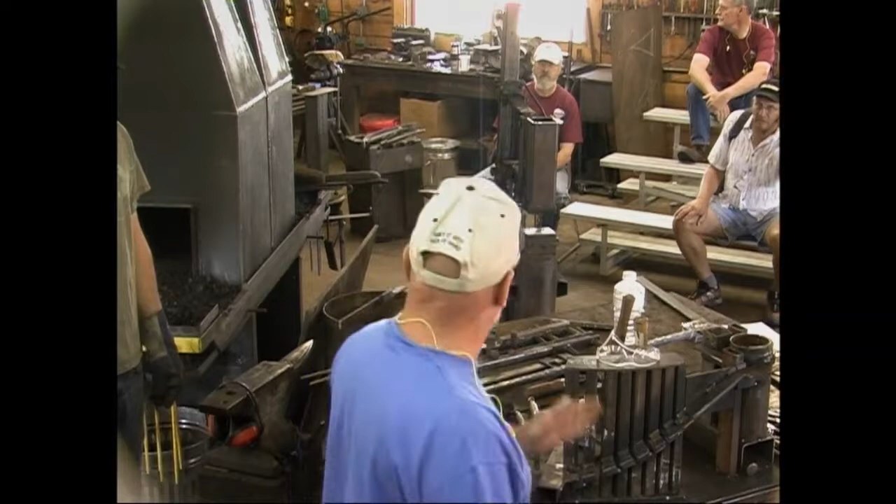Thank you. This is pretty awesome being here with you guys and in this place.

When I first started blacksmithing, I didn't know about Rocky Mountain Smiths, and I kind of just clunked along trying to teach myself. My great-grandfather, when I was a little boy, inspired me, and I said, this is what I want to do. Honestly, since I was 4 or 5 years old, I wanted to do blacksmithing, but I used to say, but I want to be an artist too. At that time, in my vision, the two didn't work together, but here we are.

When I heard about Rocky Mountain Smiths, there was another blacksmith I competed against on a job in Telluride. I won the contract, did the job. He came kind of grouching to meet me and asked me where I learned, and I said, right here. I don't know anything, I'm just teaching myself as I go. I had Jack Andrews, The Edge of the Anvil. It's an excellent book, and there's a new version now. You should have it. Just do the steps in there, and it'll take you far.

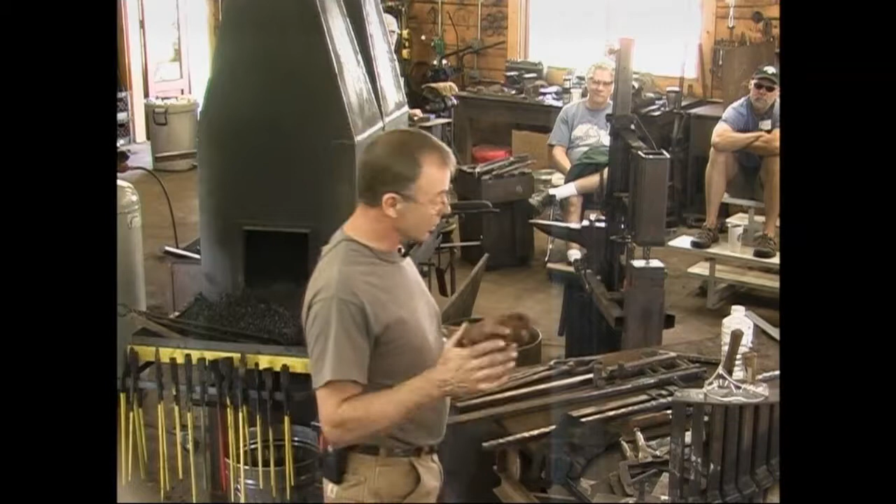When I was young, I worked in a fabrication shop where we built railing, lots of railing. It was aluminum, we had many products, but that was our primary line. The engineers weren't careful, they kept putting plus or minus everywhere. I learned a big lesson from them because I was production manager. Everybody that worked in that shop producing worked for me, and so every mistake was mine.

Plus or minuses, those guys didn't work for me, I could not tell them what to do. And I learned how to measure and lay out because they didn't. They knew, they were highly educated and intelligent, but they didn't care. So all of us worker bees had to constantly rework and rework. So this fixture might look like a lot for a scrawny little piece of handrail, but if you make it right the first time, there you are, you make money.

And the other thing about making it right, finding a way that works and doing it that way every time, is you'll be faster. I find if I haven't drawn something fully, even if it's an artistic piece, I want to know where I'm headed. If I haven't really got a full plan in my mind, when I come to the fire, I'm wasting heats, I'm making scale. So know where you're headed, make a plan, and then go for it. You can work fast, you can be productive, and you can make money blacksmithing.

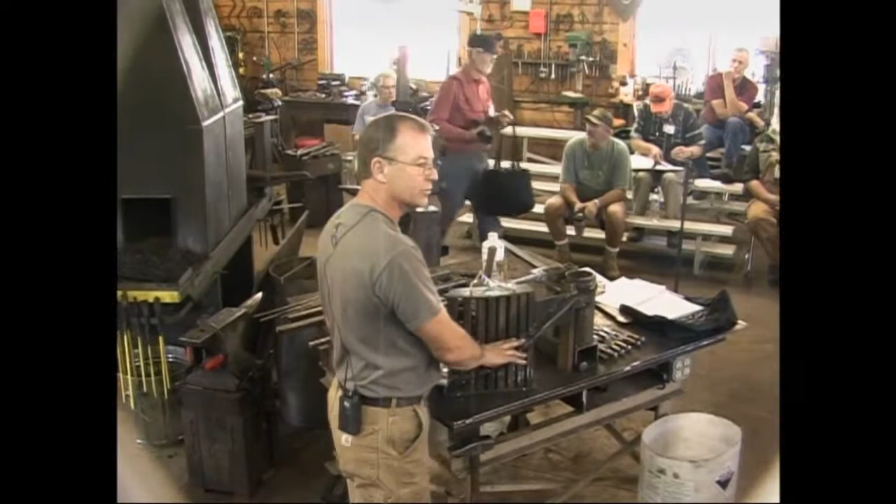We came to the exterior and there were 4 sets of stairs coming into the home. They all had similar handrails to this. This is actually the form built for half of one stairway, so there's a left and a right.

I always, when I'm on the outside, I look at the house and view it from the outside looking in. Every drawing I do, I've been doing that for 30 years, so I don't confuse myself. This is the left side, the right side's over here, matching. When you walk up to these, I don't care where you look at them from, these handrails and the other 3 sets all match.

They're exact, or as near as you can do. We work to plus or minus a 16th. We work in 32nds doing hot work, and you can do it. You can definitely, yes, and very, very doable. So the form is worth the time.

First thing I do, I start drawing it, and I've got some handouts that we can give you guys. That show there's 3 pages for... I should have split them and started. I didn't number them. They show the field measurements, so a pencil sketch done on site.

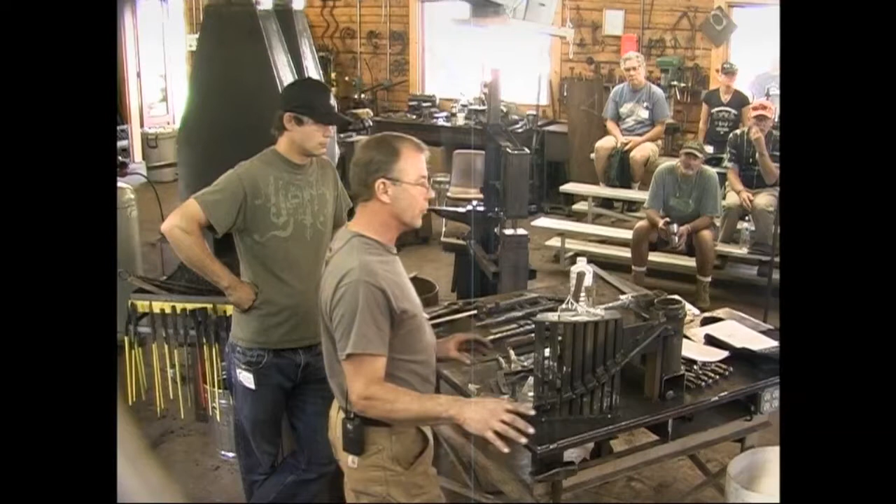Lee just reminded me, date your work. When you go back to a file, sometimes the job will stop for some reason, and it's really important to know when you did that work in the job because changes have been made, and you can place that drawing in the schedule. When I don't do it, I regret it. So date your drawings. Probably those don't have them.

Whether you're measuring for something with a helix or just a straight stair rail, there's a few things that you have to know. You want to know where you're attaching the railing. Does it attach to a wall or a column? Is it attaching to posts? Is there going to be brackets mounted on the wall? You have to find those.

You have to find out what are you going to secure to. Find out what's in that wall. If you show up with a finished piece and you can't place it there, now what? You're spending money reworking your piece. So up front, find out what's in the wall or whatever you're attaching to.

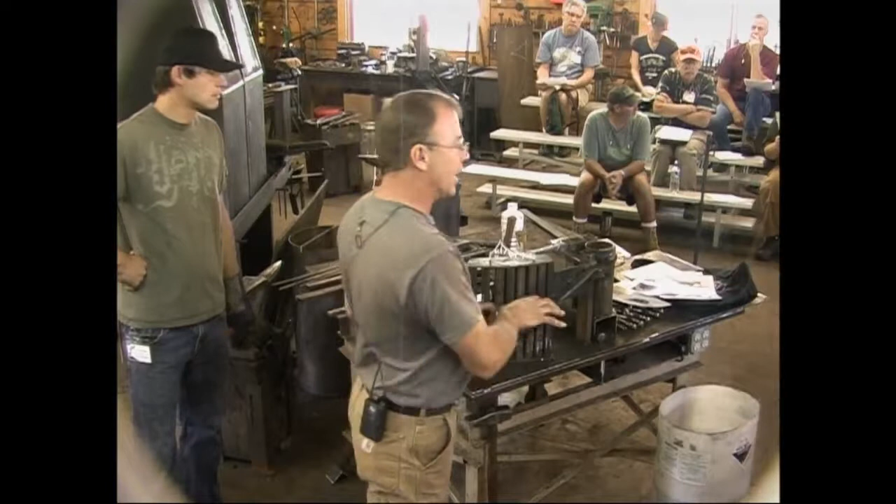So I know where I'm going. I go out to the site, take my field measurements. I need one of these. I take my field measurements and I make sure that I get all of the dimensions of the stair. Each tread, its run, its rise, the overall. This one's small, but if you have 6 treads or 8 treads, get the full length.

You want to know, go ahead, in this particular home, it's all limestone block. And so I needed to check the right height and location, make sure I wasn't too close to an edge of the piece of limestone. I would have to adjust where I'm going. So get all of those, your foundation first. Know where you're going, get that.

Mark it on your drawing. Draw it, take pictures of it if you want that. And then I do a plan view and an elevation. And when I get back to the shop, I know what I have. So you'll need the relationship from the first nose, the top nose of the stair, and the bottom nose to the building, wherever you're attaching.

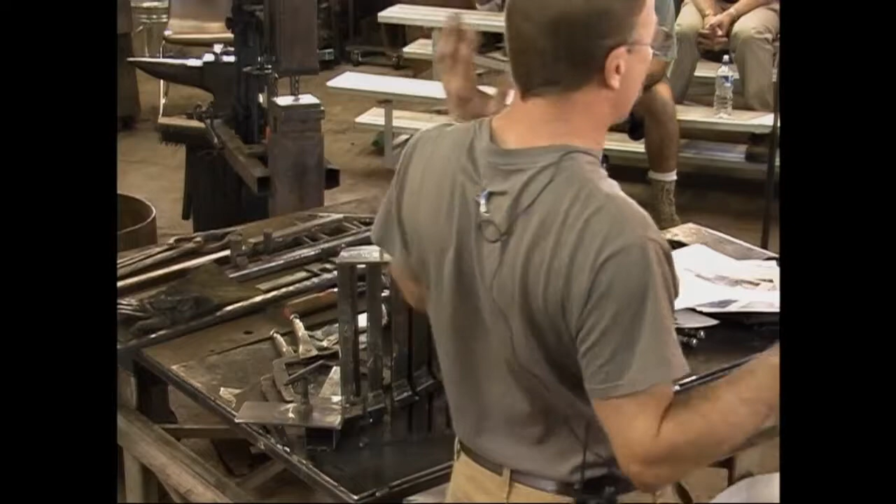You can see it there. That's my riser height, that's all I needed for this particular one. It's pretty easy, and then everything else is looking straight down. It was the measurements I took on site. I didn't have to do any real calculations other than - then I needed to know for a bending form, you're always bending against the inside edge.

You can bend the other way. You can hammer into a swedge. But when you're doing big architectural bars, it's really difficult - you get a lot more drag. The force is easier to apply bending around. So you want to work to the inside of your curves.

If you're doing a big curving stair, James has pictures in his portfolio of gorgeous forms, and they built 3 stories of railing. They built around a form, on the inside of the curve. That's the easy way. Avoid doing the other side if at all possible, but you can do it.

So we start up here. Actually, we're going to start here because it's easier for us to bend this one. We have an indexing point on this rail. It's slit and drift, and then we plug weld it in around. The architect drew this, and our cap has a 2-inch swell on the end, and we have a 2-inch ball. He wanted those two to match.

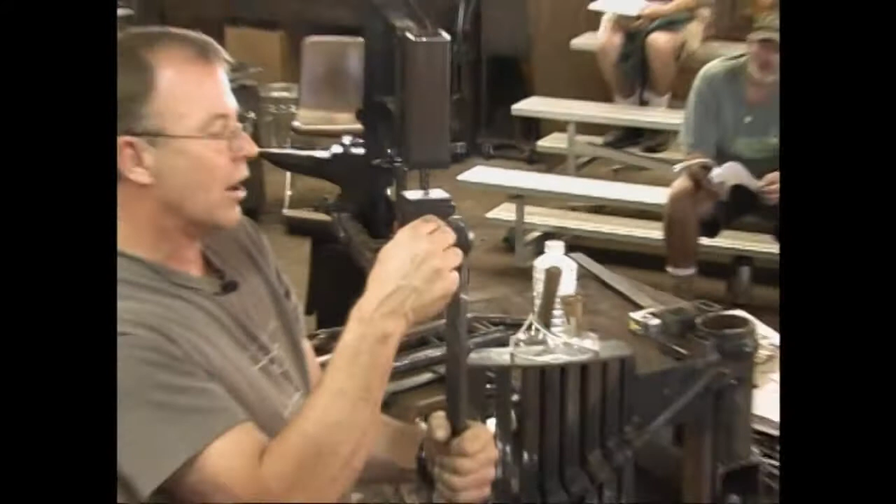And I only come through with a 3/8 stud to join everything. We slit a hole for a 1-inch drift, drifted this out and welded that in. You could upset it and just put a small hole in also, if you want to do it that way.

I have a bunch of them to do, and this is how I feed my family. So I plug welded that in. That's probably cheating, but it gave me a nice big swell, and it's hot slit, traditionally done. It's just got extra metal added in. You could cut that piece long and forge weld it if you want.

But that index is on our form, and we want this to be exactly over a spot on the site. So I need to hold this perfectly in relationship to everything else.

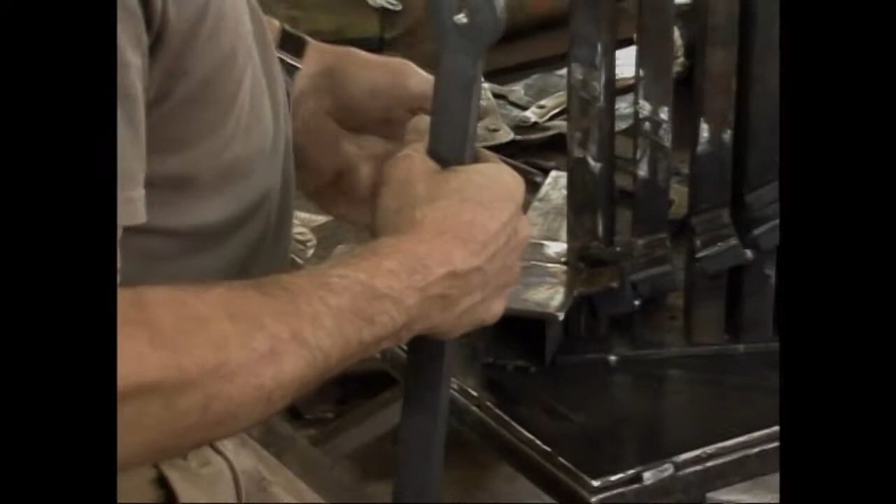There's a stud that we weld into the form. Often we'll just weld a nut underneath and run bolts through with a cordless. But that drops down there.

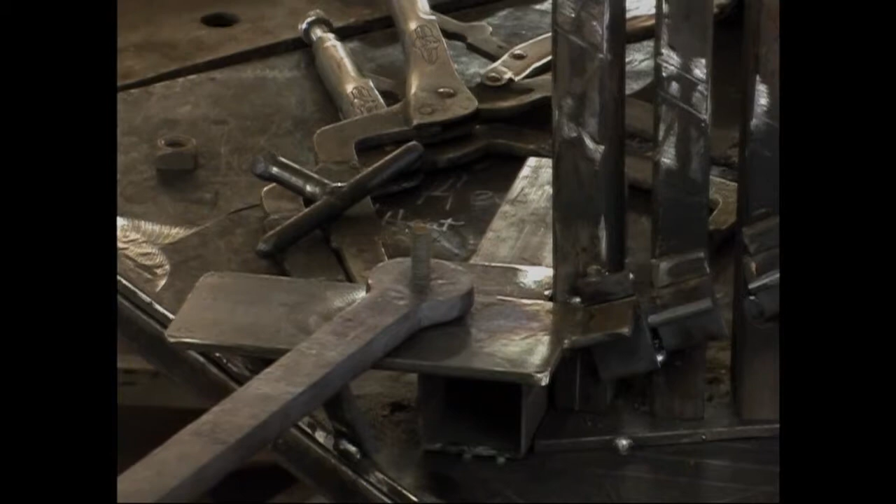And every time, this piece is going to come back to this form and fit in the same place. Whether you're doing whatever you're bending, you want to come back to the same exact spot on your form if you're taking multiple heats and multiple bends. So you need some way to index it. It could just be a silver pencil mark and lining up, and often we do. But for this, we really have to hold it.

We're twisting, we're bending, and then we're going to put a lot of force with the 90. The other reason the 90 is done last is all of this bar is going to stick to this form, and it's easier to clamp it and make that bend. Making a tight bend around a form, it's going to want to pull and slide on you. This way, we're stronger than the resistance in the metal.

So I want to heat that. Talk about that too. So when you bend, if you have too much heat, you'll get kinks, you'll get bends you don't want. If there's a hot spot, it's going to bend there first.

We know it's 2 13/16 to the bottom of the bar where the bend starts, to the center of our bolt. We've got that marked. We're taking like a 3-inch heat, 4-inch heat. We'll line up our marks on... can you see this, James?

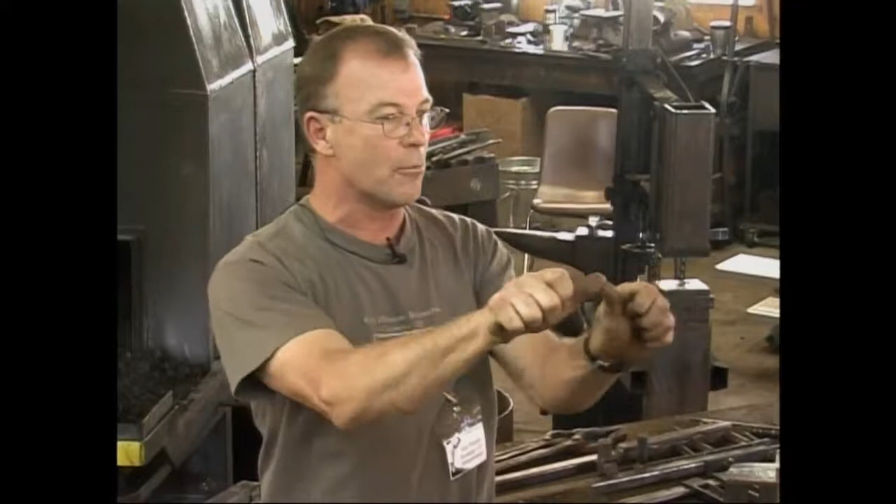Whenever you bend, there's 3 points of force involved. If you grab a piece of wire and bend it, you're holding it in two and you're pushing. Whatever you bend, you have to have 3 points of force. When you hammer on the anvil, you're hitting across the anvil and you have this. So, I don't know, maybe I guess that's 2.

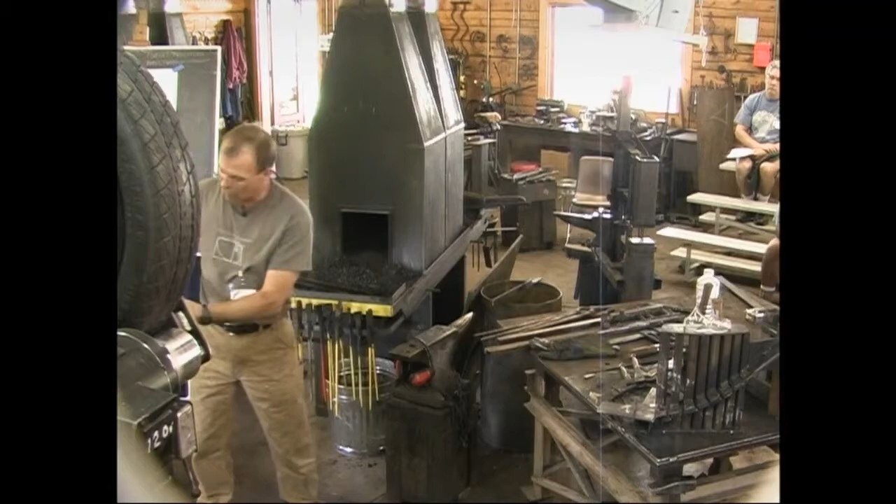But to get a bend where you want it, we use 3 points. And the bending forks, we line them up so that the center of this bending fork is grabbing just at that bend, and we pull it around so that becomes this point. We know where we're making our bend.

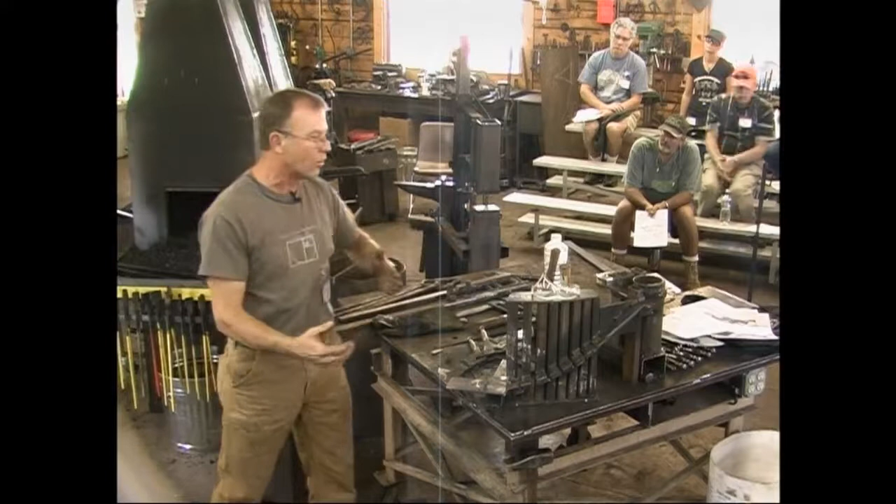You don't want to have to adjust that very much. You can with a set tool, but make that heat right where you're making the bend, and try to keep your heat behind your bend rather than in front of it. If your heat is in front of a bend, you'll find you lose your force and it bends in front of where you're working, and you can't get there. You've got to hold that, take that heat out, pull it down and come back to the point that you're bending. And then you're going to work.

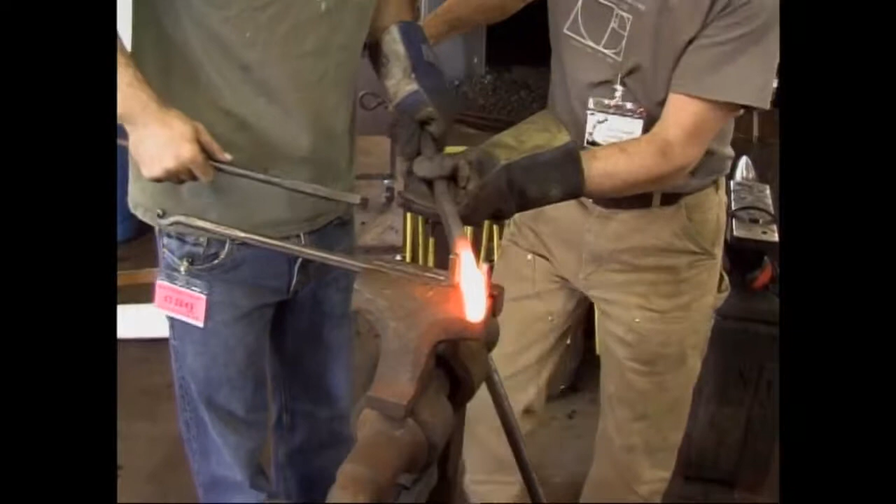And we'll move it until we're at that point, make the bend. You can do it over the anvil. About 3/4 of these pieces, I just came from the fire, popped it, and we did it. So we have our line right here, and we can see that.

So we come in, make our triangle, center our line with the center of our triangle. That's real important. And then we're pretty much right there. We've got the twist that's already interfering.

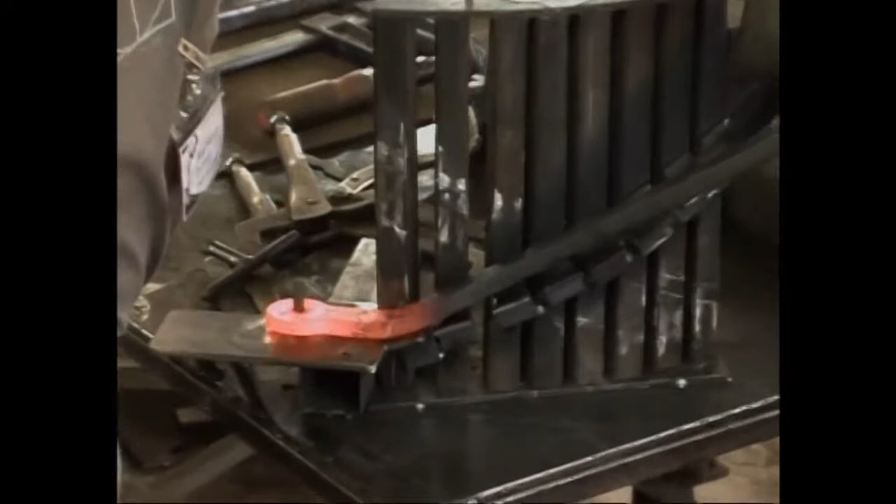Brush your work every heat. Keep it clean. If you let it cook on there, it's a lot harder, even with a power brush—you really tear up your hammer work. So brush every heat. It'll make your arms strong.

Did you make your gas forges? That one I bought. It was kind of a basket case, and it's made in Canada. It's a really nice forge. The lining was all busted out of it. Part of that is castable fire clay, and part of it is insulation board.

So we just recut it to fit the insulation board on top, put some on the sides, and then we pour the bottoms. We tear up the bottoms of the forges and have to replace them pretty frequently. So I use castable—it's cheap and really easy to work with. It needs to dry for really 48 hours, so that's the only drawback about the castable fire clay. If you're working and you break a forge, you either need another one or you've got to wait.

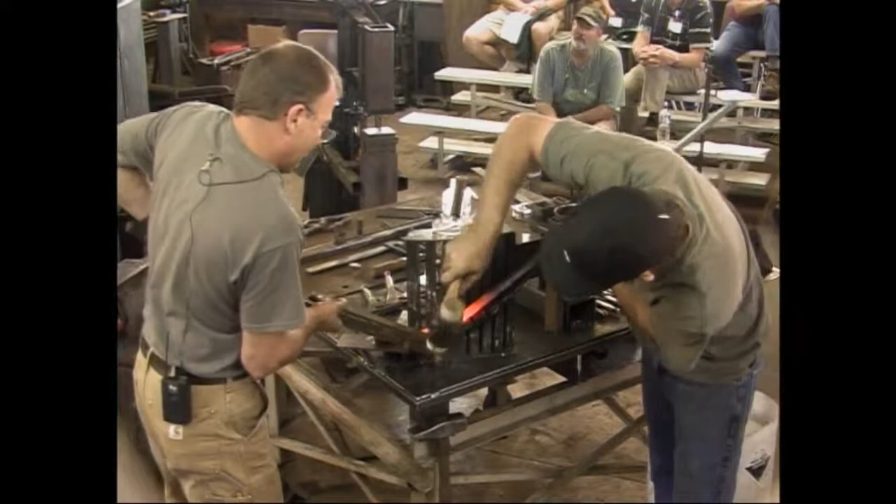I can hold down with the bending fork. I was a little high right here. Lee can just kind of pull—that's doing it. I'll pull down, he's lifting up. Now it's time for him to grab a crescent. Okay.

Whenever you're bending a helix, there's a little bit of twist as you go. The larger the diameter, the less it shows up.

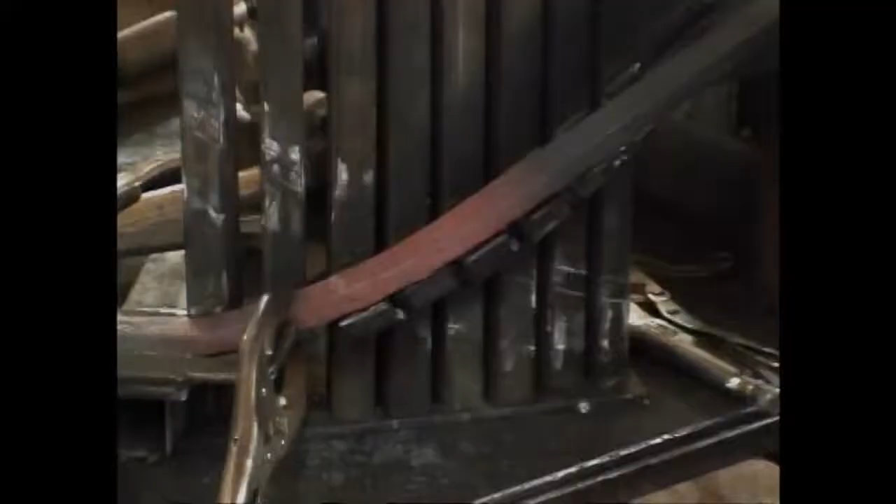Come in. Okay, that's in. So I'm not actually doing any pulling—I only work when he's actually working. A little more twist, the inside's high. Yeah.

It's really tempting for the guy with the bar to just wrap that around, but then you get ahead of the actual bend, and then you've got to get rid of that.

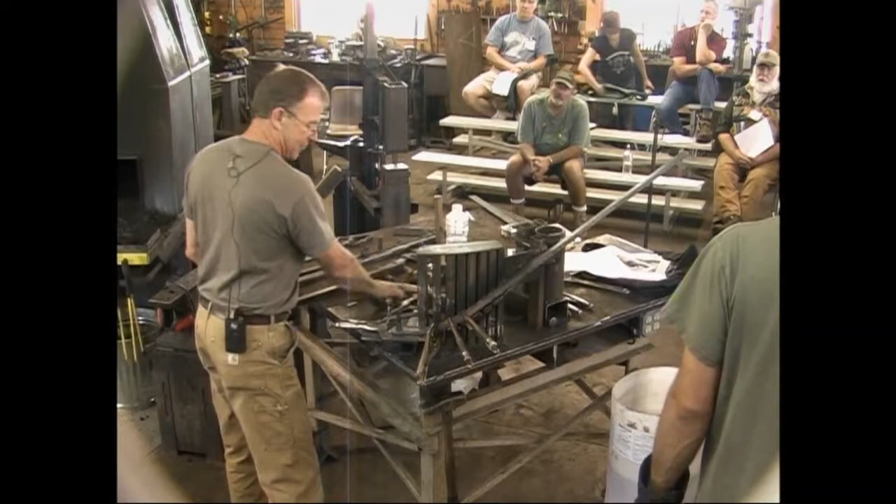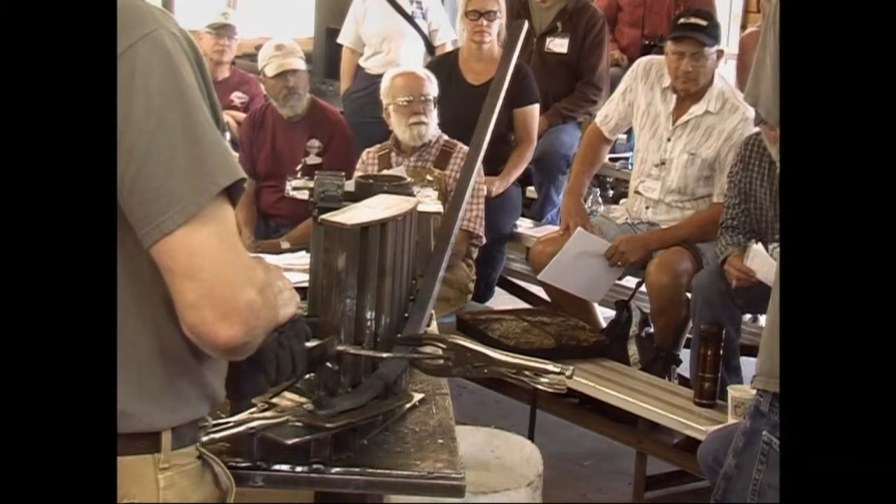Cool your clamps real often, especially this style. The C clamps, these ones, they don't get to the spring. We call these the alligator clamps because they hold everything. We took off all the teeth because they really mar your bar. So on this set, we replaced all the screws—some have holes, some don't. So all the ones without holes, you see quickly, don't have the teeth on the jaws. Just a real quick marker. And two, make sure you clench them, because those springs go and then they don't work well.

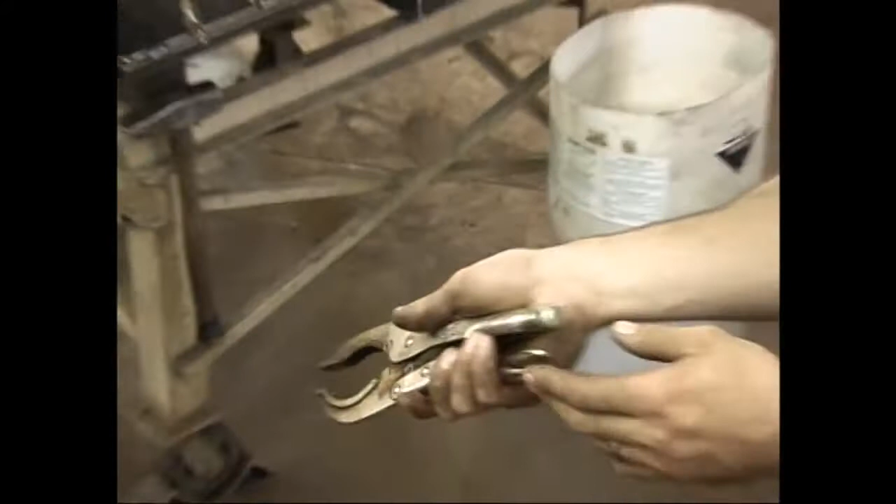Lee, can you turn those towards the camera? Can you explain it again for a second? So, for one, we've taken off all the teeth on the face here because those mar very quickly. And two, we index—let me grab—these ones have the teeth and these ones don't. So to know quickly in the shop: this one has teeth because it has a hole, this one is a smooth jaw because it's smooth. That's just a fast reference. I see it, I know—I don't waste time and I don't mar up the bar.

That's good. Under the anvil. Under the anvil. Went in that hole right there. Oh, under the anvil.

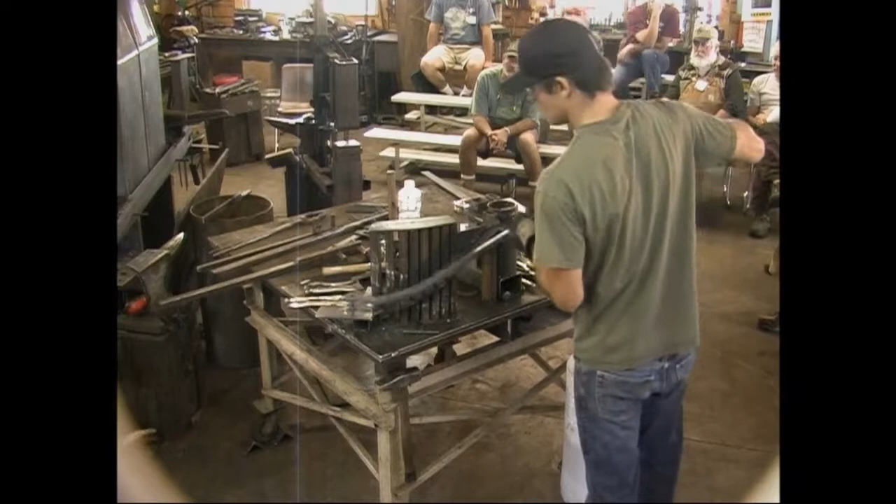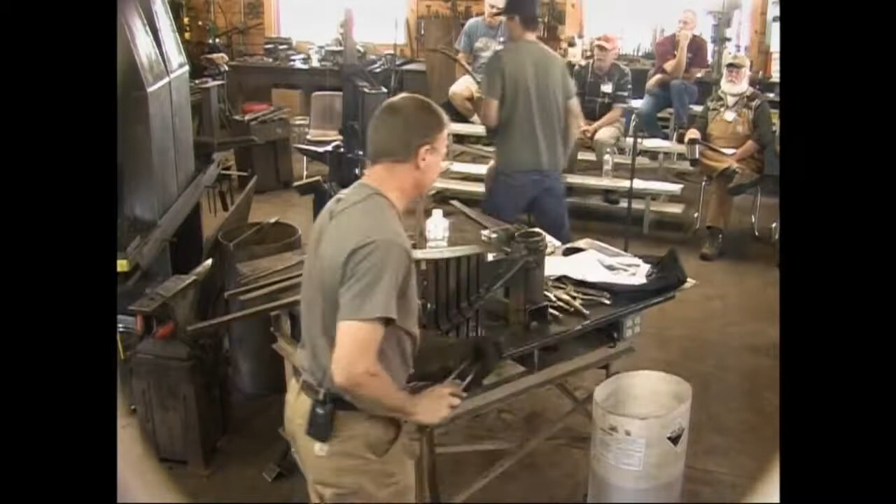Want to explain that? Look at your form, you'll be able to see where you're fit to. That's the spot where I'm just starting to break away. Lee's going to take our heat just this side of it. You don't need a lot, we're using a small forge, to show you don't need one. I have a forge at the shop that's 2 feet long that we do architectural bending in. You can bend a lot more quickly, but for this piece that's actually too big a forge.

There's only this one heat that we could use it in. So we'll take 2 heats and we can show you what we're doing. Basically, the bending is pretty easy. It's getting everything just right, keeping it just right, setting up your form.

How long did it take to make this? I don't know, I made a lot. This one, I had already done the mirror image, and I don't know if he explained how we get there. You can kind of see it cut across the other direction on the form, because it's left and right, and we can't just bend one upside down and flip it over for the other side.

You had to take, and before we even lay down our angle line for what we're bending on, we take and we draw with... just to explain. So we get our math, we know our top point and our bottom point, and we know this rake. So we can put, and we use a hydraulic hose or a heavy cord, we lay it. Whenever we have a helix, we work through it with something that'll give us a nice line to look at.

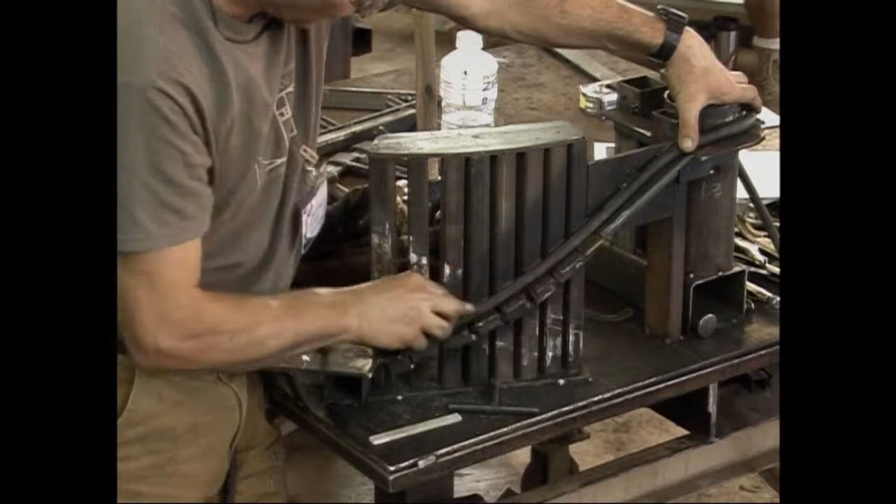And so these angles aren't here, it's just the form body. We have this one, we lay this cord on here and we know where we're coming to at the bottom. We can adjust it up and down and make it look very pleasing and get a nice line. Thank you, Lee, that's a really nice trick. If you're doing a 180 especially, a lot of them just look kinked and unpleasant, they're not very attractive.

And so for me, I build my form on either side. I've got a rail going up and one going down and my form in the middle. And I put those 2 pieces in, I know where they are, and then I bend around. I use a big hydraulic hose, just clamp it on, pull it around, and I look at it from different angles and I can see what it'll look like on site.

Then I mark that and we weld those tabs in. So that's actually made my work look a lot better since I started doing that. When I used to do it and just construct by pure math, I would get kinks because they're not always at the same angle.

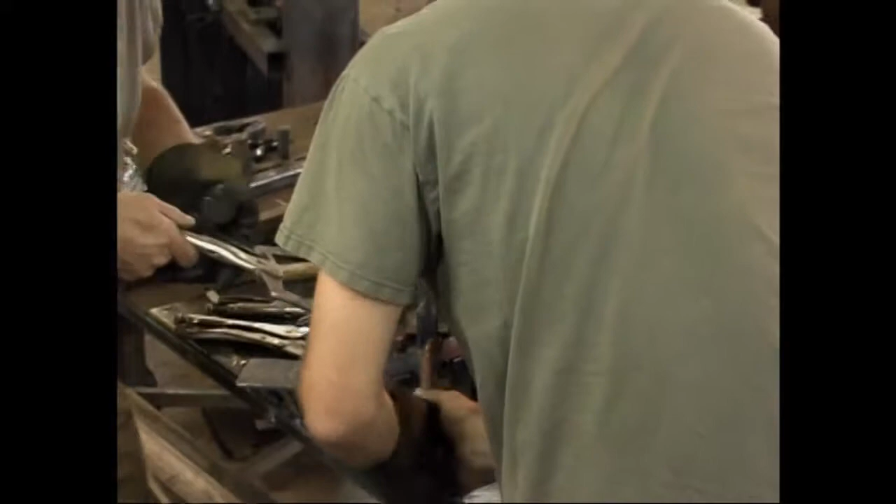Okay. Nice. And off this side.

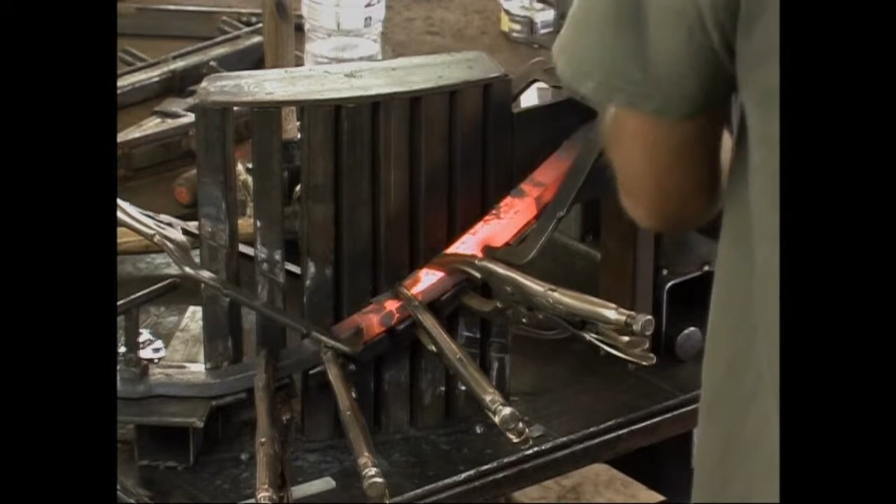So now we let the heat go out. Plan what you're going to do. Just like when you're forging, you go back to the fire, think about your next steps, plan this, know what you're doing. We've got plenty of heat here. Our next bend is right here.

In the shop, I would use the rosebud, I just heat only what I need right there. We can use the fire. So to do that, I had talked about heat behind your bend. We're not going to heat up here, we're going to heat this area and just right into there. So I've got an arrow, he can see. This stays cool, the heat's right here.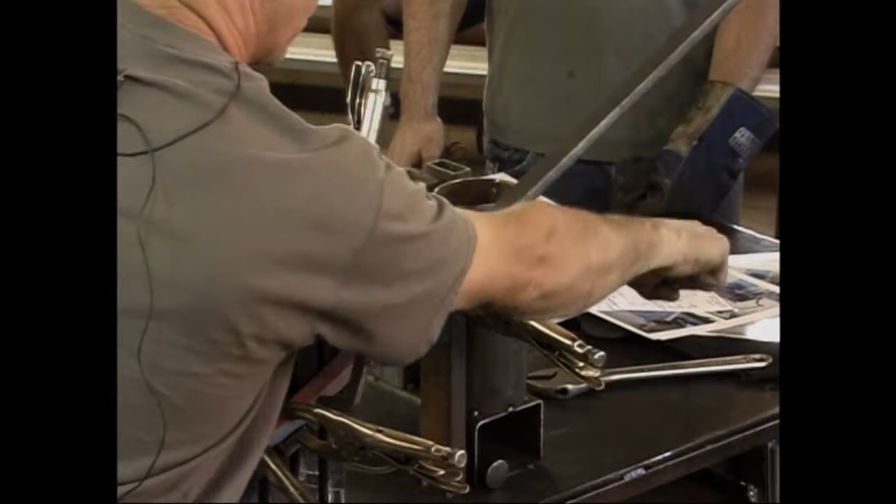And it's real easy to keep this down, but if you have heat and you start pulling, it's going to drop down here, and this spot is going to resist, and so you'll get a hump. And that's really hard to get rid of. So keep your heat back just enough.

If you're bending, say you're doing small rings and you're using a torch and doing a wrap, a vine wrap, you want to heat right at the point of tangency with the torch. Keep your heat and feather the flame behind the bend, and it'll lay right in. If you see yourself lifting off behind, you've got too much heat, just clamp it with a pair of tongs real quick, it'll suck the heat out and keep going. And so keep your heat right where you're bending, and you have a lot more success.

Like your previous heat, don't ever go forward, because you can never come back to one section without destroying everything else. So every time we pull it off the form, we check, flip it, look at the bar. If we don't like it, we heat the exact same spot right then and there, do it again. There's no coming back to it, it's got to be done then, or you have to leave it. And that's one of the places where Francis' words are in my head.

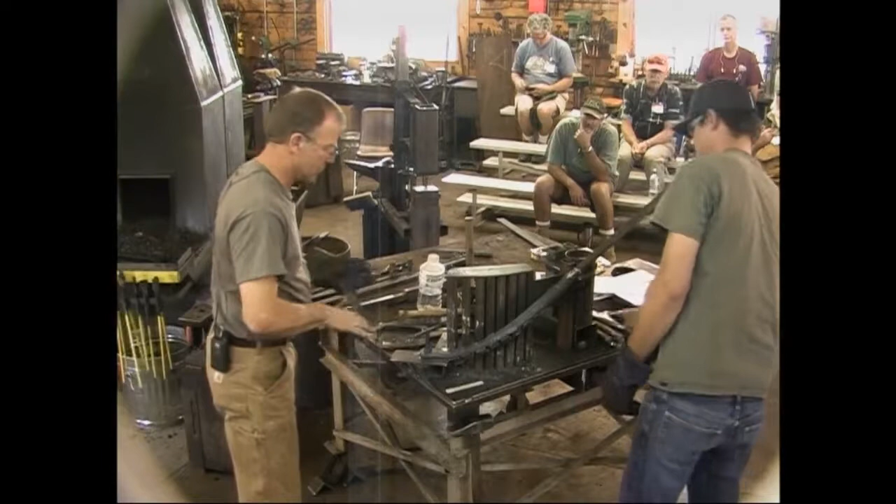I'll get this little sucker. Lee's going to brush that before he puts it in the fire so he's not cooking scale on.

Honestly, for years I didn't do that. I heard Dan Boone say it over and over - brush your work every heat. And I thought, man, I'll just use a power brush when I'm done. Then I had a job where I was able to time the two, and I saw a huge difference. This is a lot faster, and you're not brushing for hours, which is less pleasant.

How many people are doing architectural work here, actually? Yeah. You can also do sculptural forms - if you have a product line, lamps, organics - there's a lot of things where forms will save you time.

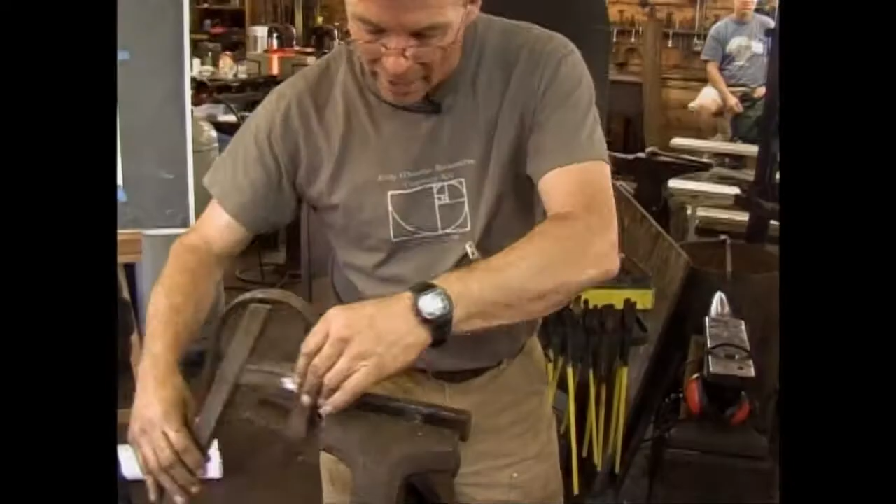So this jig, you want to hold your work very securely. This jig is made to slide into the vise - it's got a tab on the bottom. Often when you're hammering out here, like Clay's riveting tool, we would put that in the vise, and we would have this tab underneath. We would grab this here, and I can work down here, and it's locked in solid. I would pull it out of the fire, stick the bar in, pull it around.

This bending fork has a little helper so it doesn't dent - it could be radial. I just pull around, and then at this point this reaches to put that reverse bend, that's the one I said is really hard, bending in. The rest of the bend you can pull by hand, but this fork is necessary for this. So I would put this in place, push down, pull up slightly, push down, pull up, and set it in.

This little jig actually made us a lot of money making conduits. The next nice thing about it was they were done hot, and we would put a finish on and it would show that work. So there's all kinds of different forms.

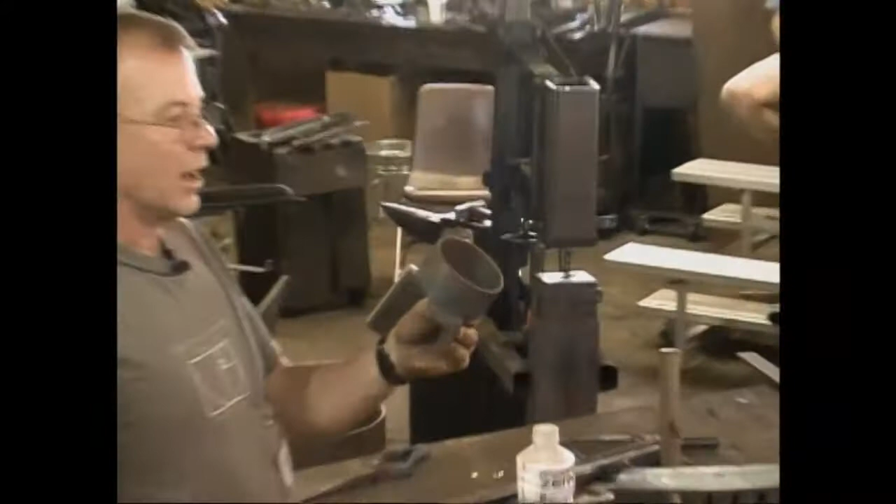We make a lot of rings - I have these in several diameters. This block is adjustable for the width of the stock. Clamp one end, pull around, slide it, clamp it, and pull. Just clamp it with a pair of tongs, it's in the vise - grab it, pull around, and you can finish your bend real quick.

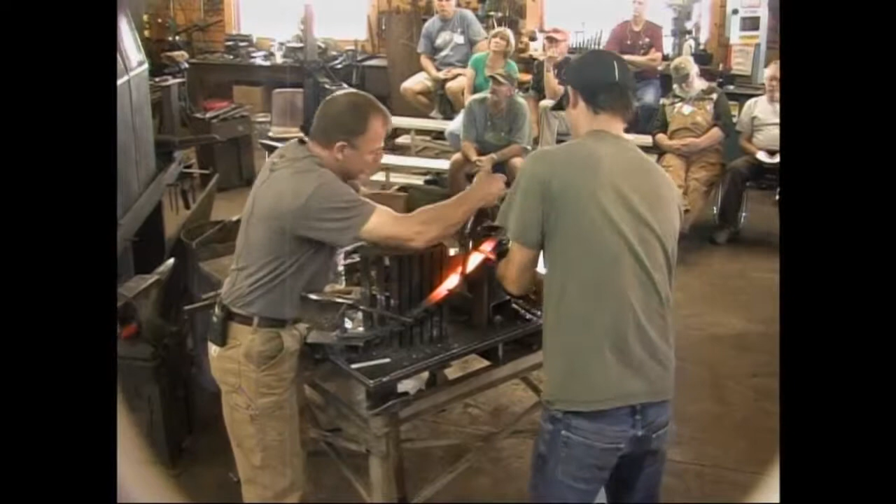He's going to wait till we get all these clamps back on. Okay, just a fold, and that's good.

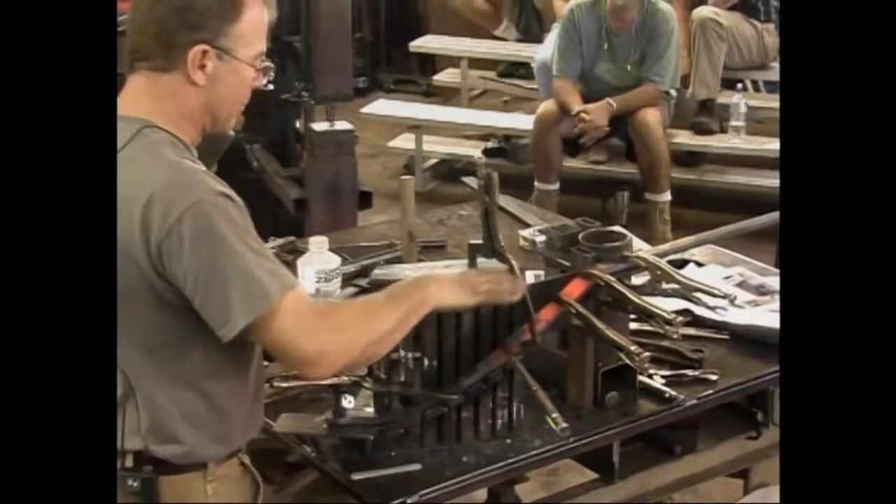So now the bottom lamination of our handrail has a level, a helical - it comes out at a 45, a helical bend, and then straight rake, and now it's level. The last bend in this is the 90. We'll let this heat go out.

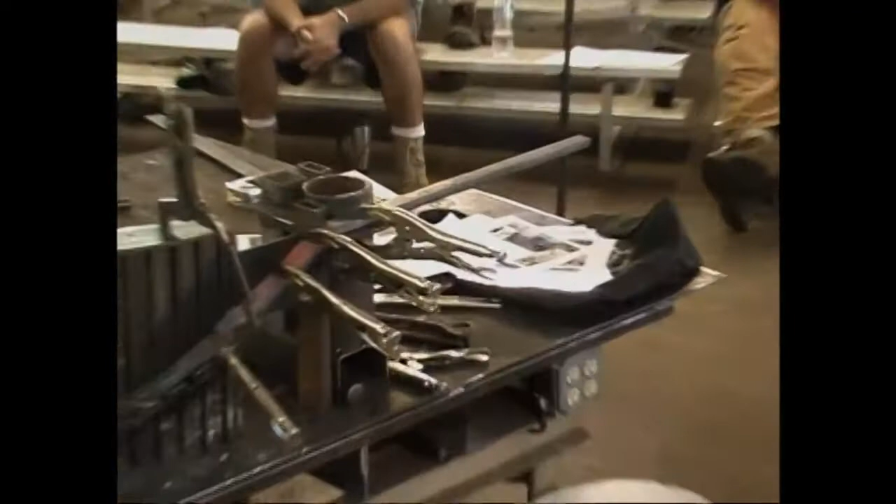Point of tangency, the place where it hits the circle, is where your bend starts. So we'll heat to there, going that way. Seems obvious, but arrows are nice.

Rod, on your sign brackets, what were you using for conduit? Half-inch pipe, I think, for that one. We used pipe for all of the conduit - I didn't use EMT, no galvanized, just black. Do a good finish on it, and it was just right. And we made, I don't know how many of those.

That same fixture, he started using that lighting on a lot of other sign brackets, and we would make them 42 inches long for some really big signs, and down to not much longer than that for him, 18 or 20 inches. So that tool has been used for years. We just did one for him a couple years ago after a long period, and I pulled that out for him, and there it was, ready to go.

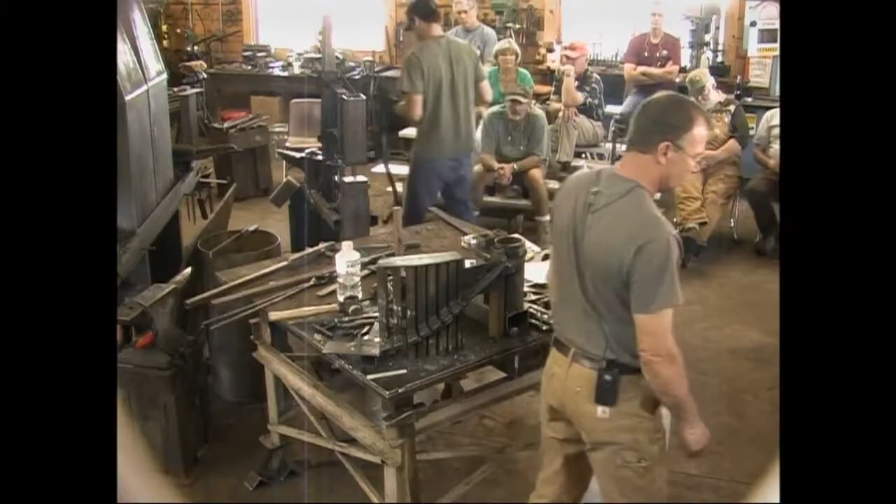There's that. What did you use to make that channel? Piece of pipe, and I ripped it. Plasma. What was the question? What's the convex made from? What was the answer? A piece of pipe, ripped. So I bent the pipe first.

That's a hard shape to bend, the anticlastic shape. It's real easy to bend in pipe. So bend it first, find your centers. You know how you can find the center line on a bent piece of pipe? Take it on the concrete and go like this. Flip it over. Okay.

You don't want to do this on a nice finished piece of metal, but a down and dirty quick way to find the center - and I don't do it this way, I have a different way, but this seemed obvious - you take your bent piece of pipe, you rub it along the floor, there's only one point of contact. The bottom of that radius, that's the center line. Flip it over, do the same thing. Really what I do, I put it on the table, I put an equal distance height, another piece of pipe, and I rub a fine file across it. But that sounded pretty cool.

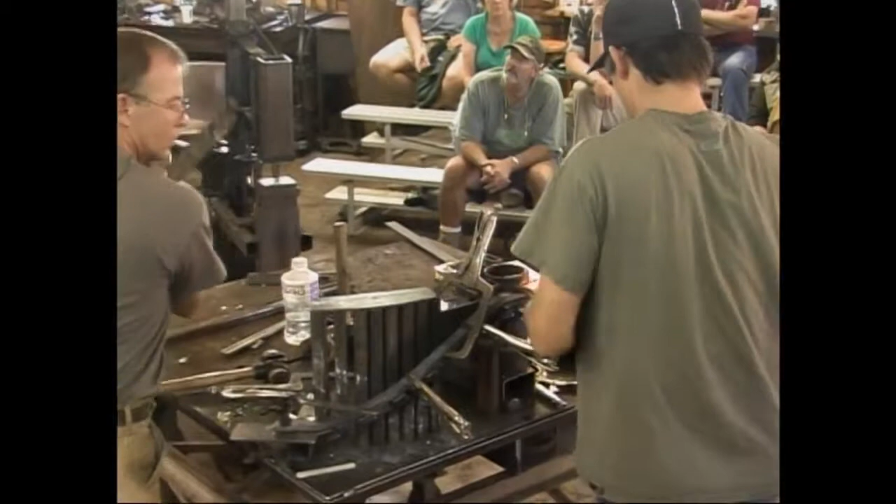Go ahead and take that little - there's a little bit of twist happening. Lee's going to fix that before we go far.

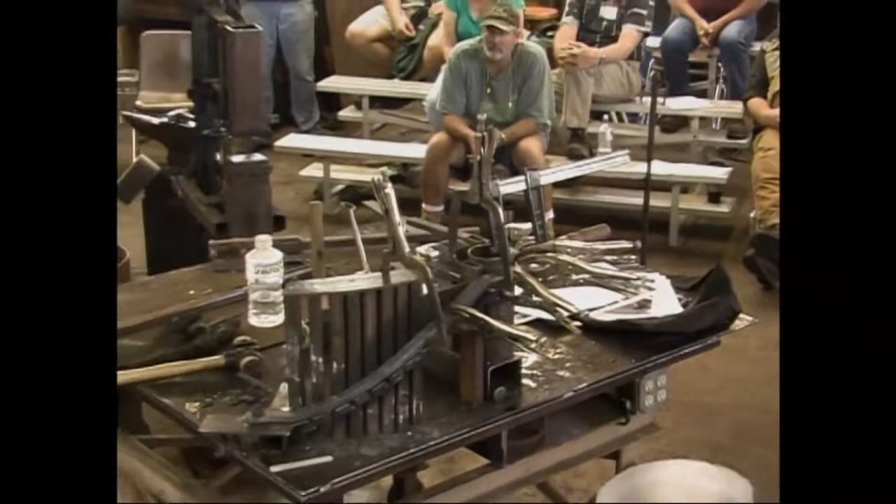So Rod, on your big bending fork, is there any special kind of steel or is it just mild steel? These are just mild steel, A36 flat bar. I used to build them single-sided. It was just enough, and I made them out of solid. That little piece that's going around is solid - I made that a long time ago.

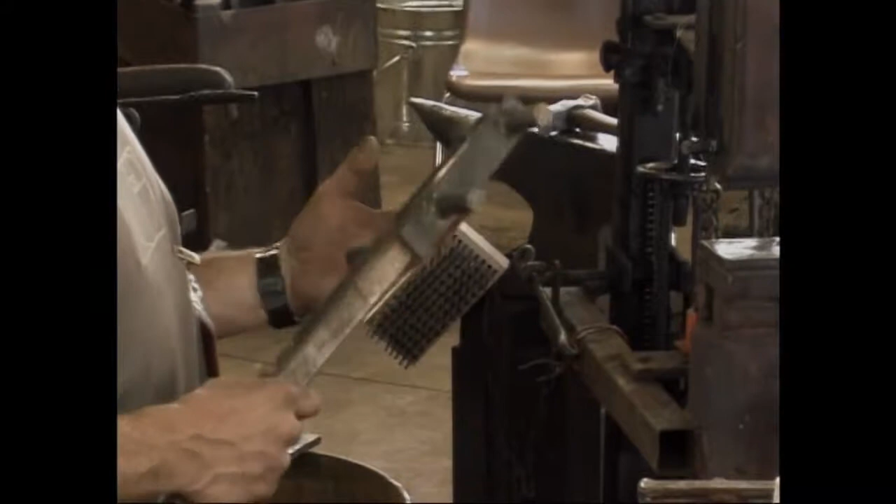We added these straps because I needed to repair a fork in the middle of a job, and it's like, that's a quick way. It did it - realized I should have put that on to start with. So the strap actually reinforces the strength of the tube. Still not a lot of metal there - it's pretty light, but it's very strong.

We've got 10 of these, and some of them are pretty old - they're a little tweaked, they've been repaired. But that pair out there is hopefully our final design on bending forks. They work well. Sometimes when I'm working with a more refined finished surface, we'll put wheels on, like that little fork that's going around has the angle. We'll do that.

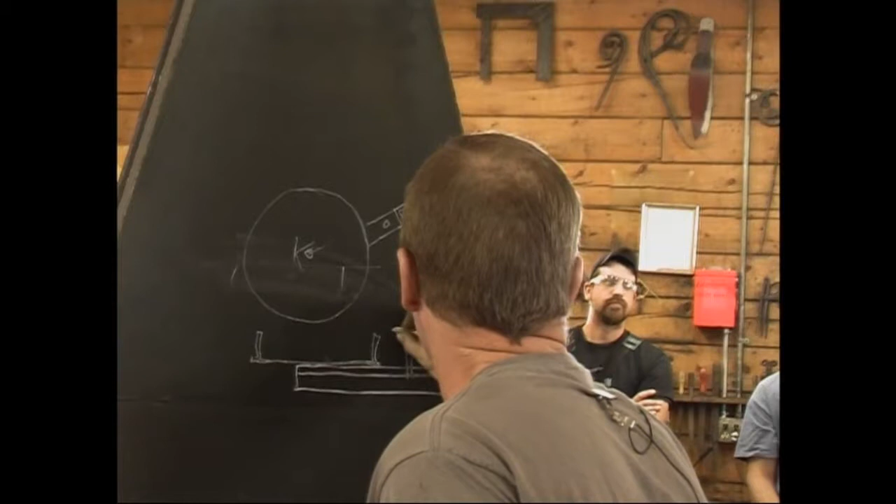You could make a tiny Hossfeld bender. I used to make those all the time. Make your ring that you want to form around, say this is 2 feet, and then come in the middle, come out with a piece of angle so it's strong enough to do work. Put a hole here, on top of this, shim this up in section. You've got your form, got your angle underneath. It's got a hole for a little roller. Piece of pipe that's a spacer that's a little taller than your form and the work, and then come across. Put a bolt through there, and you've got a baby Hossfeld bender.

You can bend radiuses, the exact radius you want all the time with springback.

Now I have a lathe. That's such a cool tool. I used to scavenge and find things. I love junkyards, I'd go and see what kind of things I could find, and I just collect steel. It's a disease, and you get a big pile out back. But now I just use mild steel mostly. 4140 makes really nice rollers, and I can turn them on my lathe.

I have a little Shop Outfitters in Winona, they sell a little bender. We bought that before we moved from Florida, so over 20 years ago, bought that thing. I'm still using it, I've done some tune-ups on it. It's got a full set of dies up to 3-inch, and then I've supplemented that. I've made more tool racks on it, and on that I have dies.

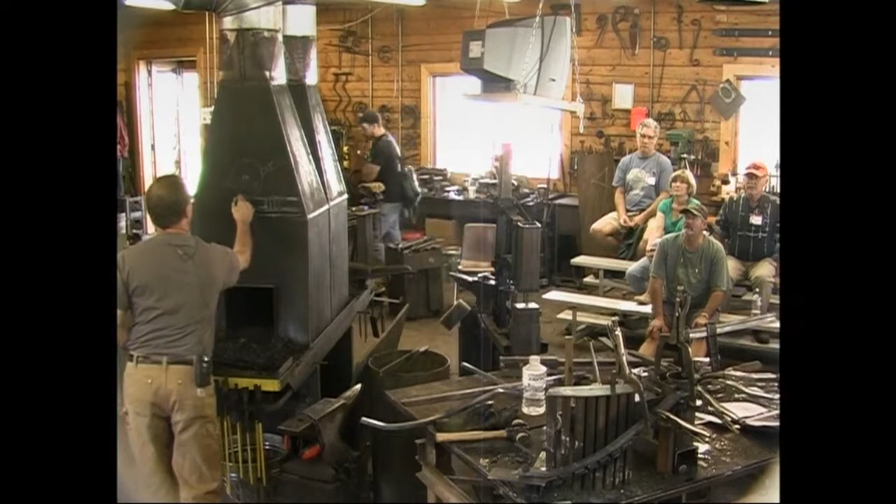Here's a nice one, this same tool, bend it just like this, and put V-blocks. Get rid of this, I'll get out of the way in just a second, James. So your pivot pin's over here, and you can bend on the diamond.

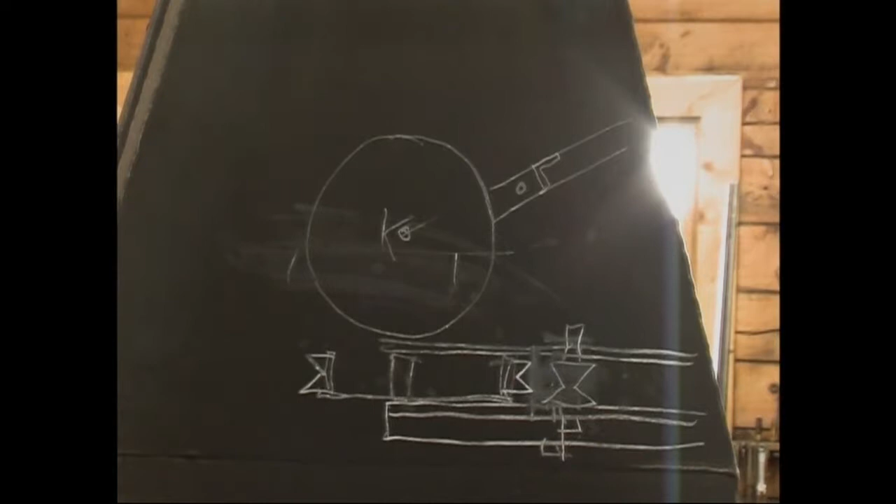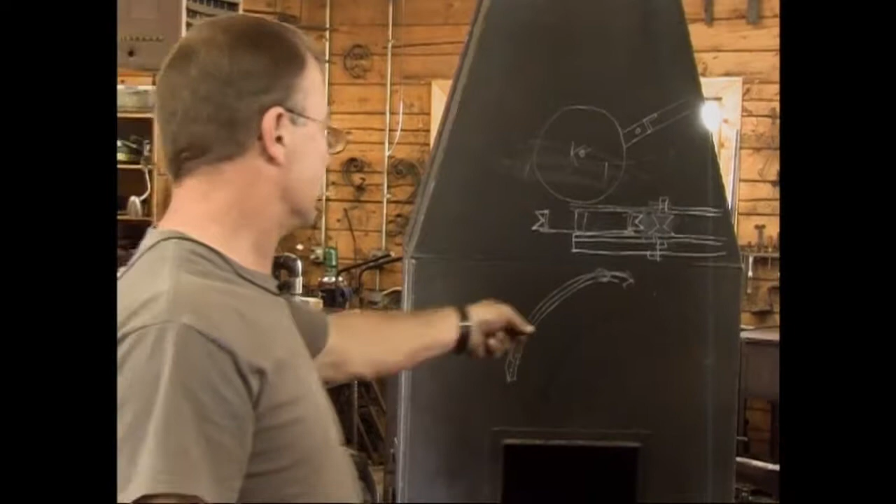We did a beautiful vanity in Ridgeway a few years ago, and there were arches, square bar, upsets on the ends. And then this was slit and drift, shouldered out, down here as well. And these were bent, 1-inch square, I think, hammered bar. And we knocked that form out in a heartbeat, just like this, but it was flat, it was angle. We bent it around and it was done. You know, you can hammer those to shape, but we needed 2 to match. The guy that was my boss was Howard McCall, an amazing blacksmith.

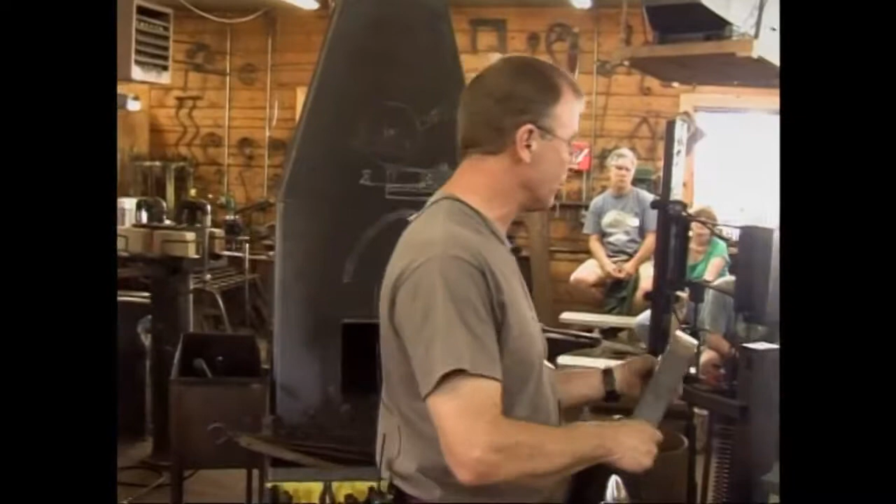This one they have, yeah, okay, here's a bending form from this shop. And Howard's a nuclear engineer, he liked things really precise. It was fun to work for him, but I mean, those bends, he was looking, he just started smiling at me. We had indexing marks on our forms, so where we slit and drift, we had marks for that. My layout was built right in. It was really easy. Just when we finished bending, while it was still hot, I could punch, and I got my center punch marks right there. Then after we did our bends, I think we bent one first and slit and drift, then we slit and drift and bent the other one after. But we were able to make them just exactly the same without upsetting or drawing out.

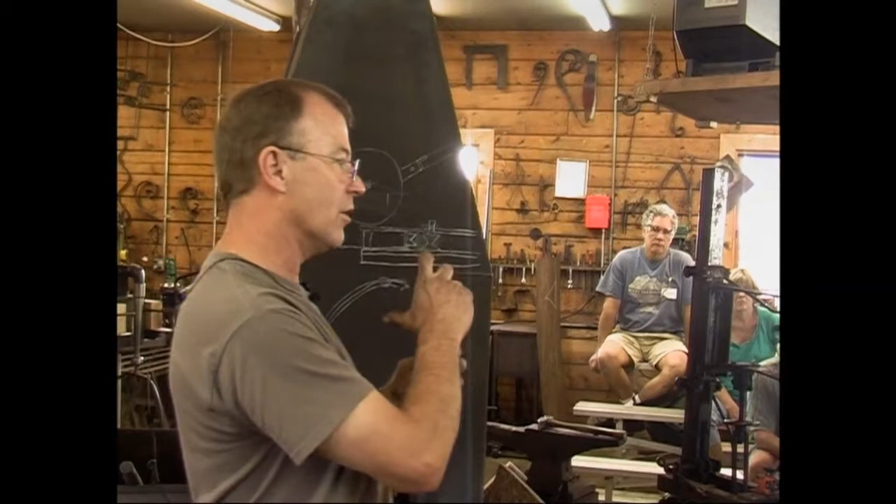And so that angle, we've bent a lot of things on the diamond, square, and you can bend round in that same type of form. Sometimes you'll want to bend something really thin that's polished, a piece of stainless steel or something. If you can bend that in angle, amazingly you don't need a full half diameter die. Try it and see, but you can get away with angles. So we have buckets of V-blocks. We use them on the hammer, we use them on the press, we set up and work quite a bit of stuff on the diamond.

It makes it a lot more rich in detail, and the only hard thing is assembly. So if you make a bunch of V-blocks, they're right there underneath the table. Those are just cut angles, little straps, weld them together. There's a V-block for assembly. You have 50 of those, you can build a lot of rail quickly. You don't need that many, you can keep reusing and moving, but if you're doing a lot, it's worth making them.

And we use those, we'll tack them onto our forms, and we do our diamond bending. Do we have any pry tool? Underneath. So obviously this is cooled onto the form. I was blabbing instead of watching. Not that easy.

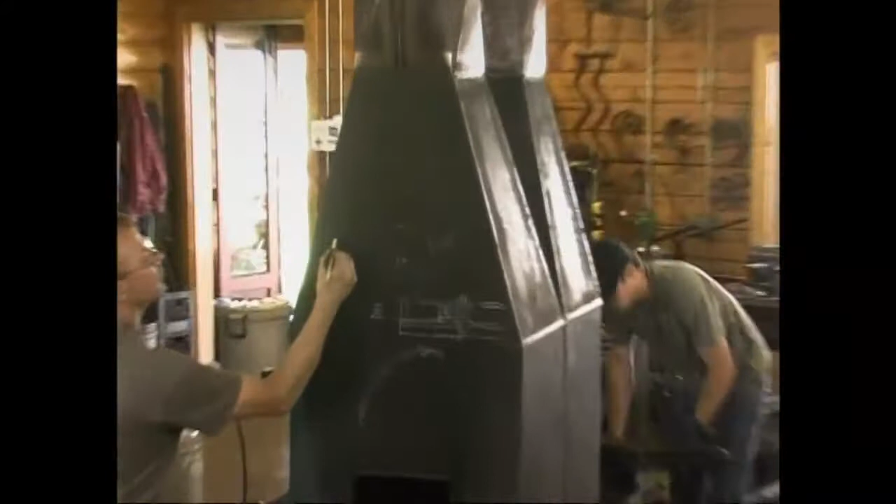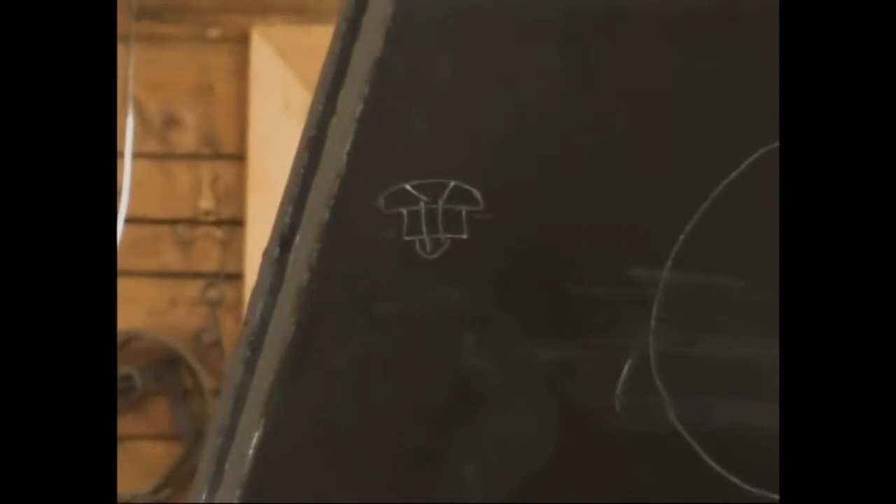I believe it's 14 5/8, this little drum. And so that's the cap. We have shims. These things right here, there's a whole bunch of them welded in.

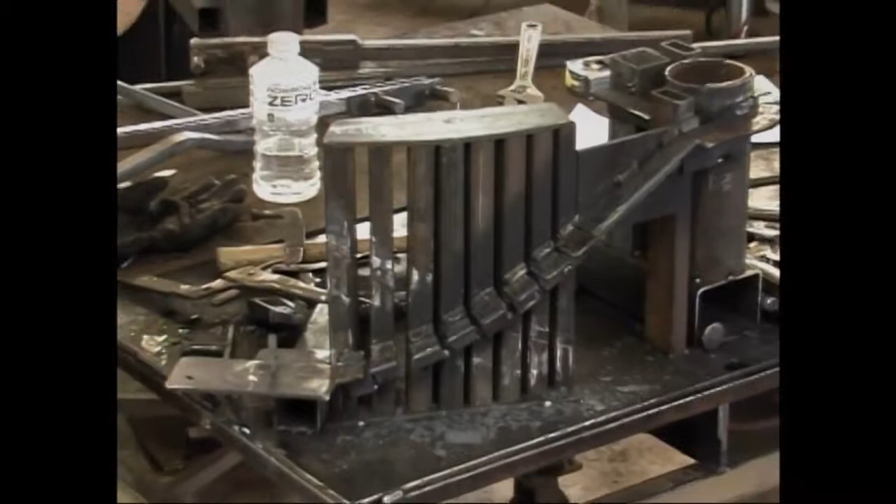That holds the bottom, the 5/8 by 1, over 1/4 of an inch from that edge, so that when we bend the next bar, it'll sit over the top. We'll bend right on top of that piece we just did. There's another thing that's really important: if you took these off and bent the 2 bars in the same exact form, but on the same plane, they wouldn't mate.

You've got a cold one there. Yeah.

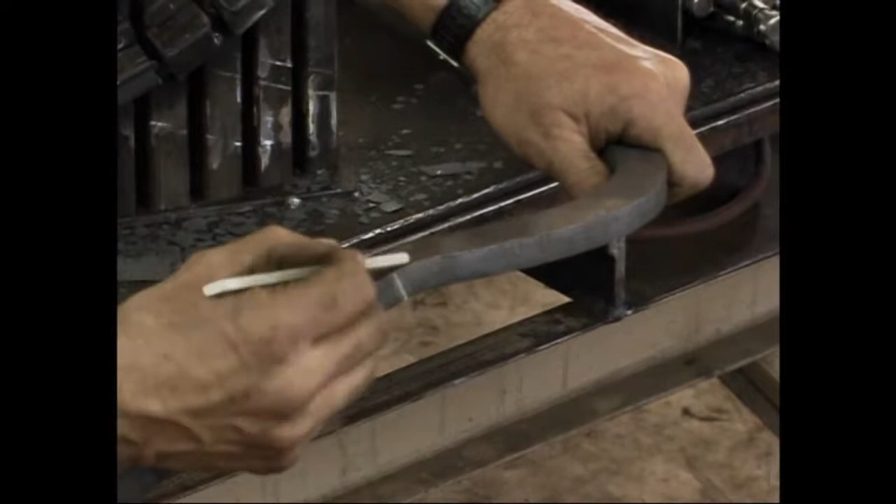This bend is, here's the pivot point, the center of the radius, someplace down here, and it bends, so this is a tighter radius than this. The bar that lays on top of it has an entirely different radius. And I'm embarrassed to say, I've done that a couple times without thinking, pulled off and bent another bar that had to lay on.

It's like, oh man, that was dumb. Yeah, oops. So we bend on top of it, so we start at the bottom and work our way up when we're bending these. I did one with Smith Boone years ago.

It was a 4-bar cap. It was massive, a chunk of metal like this. It was a handrail, and we stacked all those babies and bent them, and it turned out sweet. I mean, they just laid together. And the joinery was all traditional. They tongued together with rivets through. We built that stuff, some on site.

We went up to measure the stair, and it had some kinks. It wasn't a regular form. I had told him, well, I'll just make one form, we'll take it back, build all these sections and put them together. And we started plumbing down, and the architect had a constant radius drawn. But the stair had 3 main radiuses and then the connecting kinks. So we had to replicate that entire stair. It was over 30 feet long, and we had to build all this. It was heavy rail, that rail was massive.

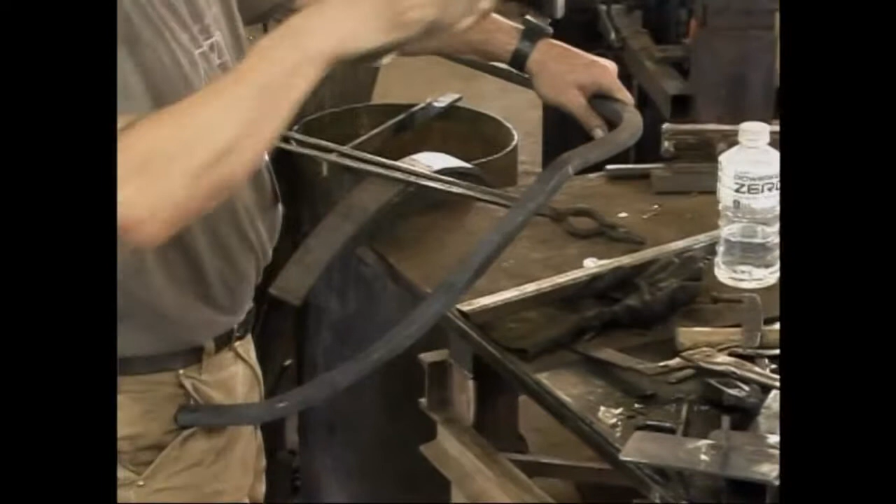But you want to stack each lamination as you go, because, say you have this and it comes down, and then it bends level. Common handrail thing: levels at the top, comes down the rake, levels at the bottom. If you stack 2 or 3 layers, the bend points are changing drastically. You'll start getting gaps and your points won't line up. So just bend them on top of one another and you can overcome that.

Any questions on this? Best scroll jig I ever saw.

Raj, if you're doing laminations that are not all the same width, if your cap is wider or skinnier, how do you adapt your jig? It's right here.

Or were you going to do that? Yeah, well, here, go. There.

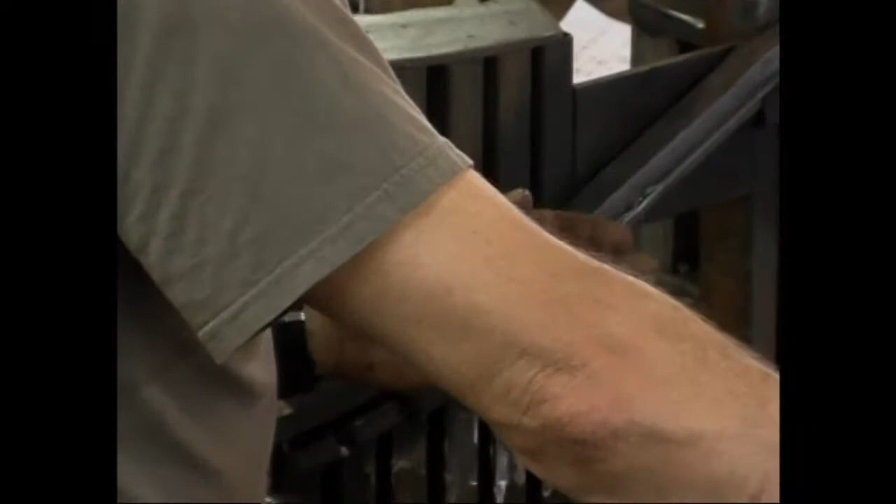So John, this lower lamination is shimmed out 1/4 of an inch from the drum, from the pipe, from our straight points. And then the top, there's a shim, and the shim is only slightly shorter, it's 1/2 inch. This bar is 5/8 high. So when this one comes on and we come around, we'll be against this inner form, so we're held out automatically 1/4 inch.

I think those are the main points on this. I thought we were going to take just a little longer to do this first one. Too efficient. We've done a lot of these in the last, we've done a lot of these.

And actually, before these, we did very tight helical bends on the interior railing. Last year I showed that form here. And that one required extremely precise bending and a lot of attention. We spent 2 weeks making each of those, well, not each, but the 3 forms, and then did a series of bends.

We had a 3-bar top cap and a bottom rail. The bottom rail set tight against the wood. It was all assembled traditionally. It needed to fit perfectly, and it did.

But it was a lot of work. We did this. One of the things you'll find, your bars are going to shrink onto your form. We showed you that accidentally.

So get them off while you still have heat. They click, you hear it click, and then the clicking really slows down, and after doing so many, you'll really tell, you can listen, and it'll tell you when to start. So if you have color, leave it on, because you'll change your piece taking it off.

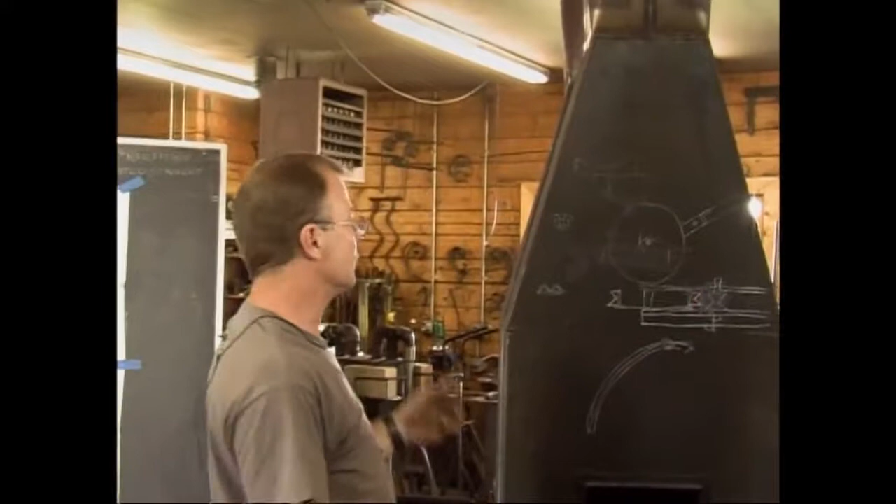Now you're doing what I said not to do first, but you're hammering into a swedge. That works well. You can stand there and turn a 3-foot diameter just with your hands, and you could do it on the step of the anvil with a hammer.

And there you've got to be more accurate with your eyeball, but you can turn a really nice round arc right there. So dress that so it's not sharp, clean off any hammer marks, and you can produce a real pretty curved shape right there. You don't need all the tools. It depends on what it has to do.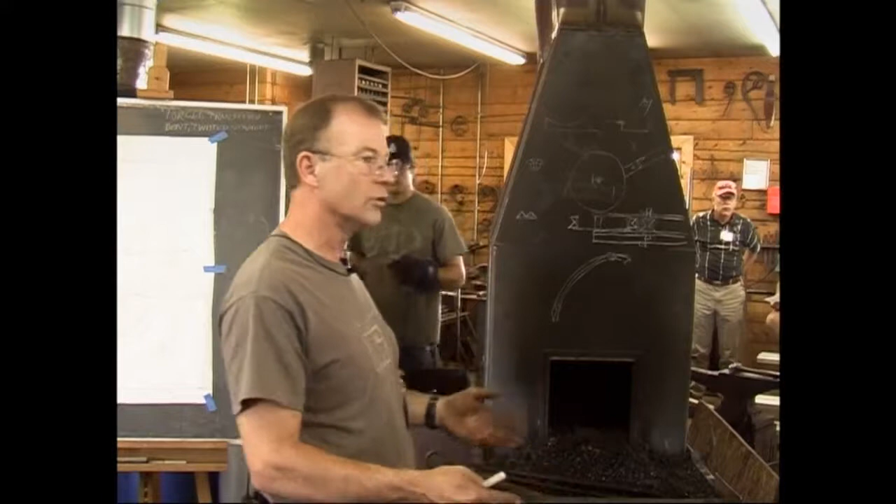Rob, will you be talking about your drawing that's over here later on? Actually, I'll do that right now. Let's go back to this layout. Thank you, James.

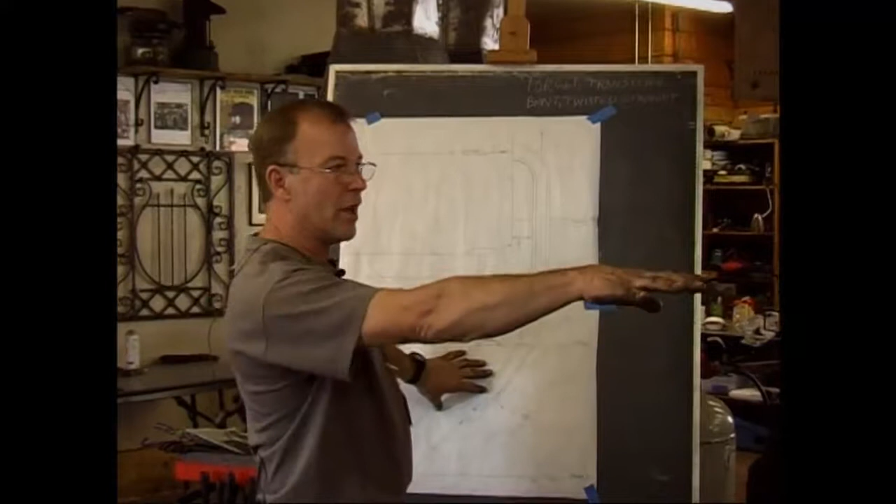So all of the math for the bending form we took off of those 2 drawings. This is the plan view. Here's the 4-inch pipe that's drawn on the steel plate. The stair tread, because that's the bend.

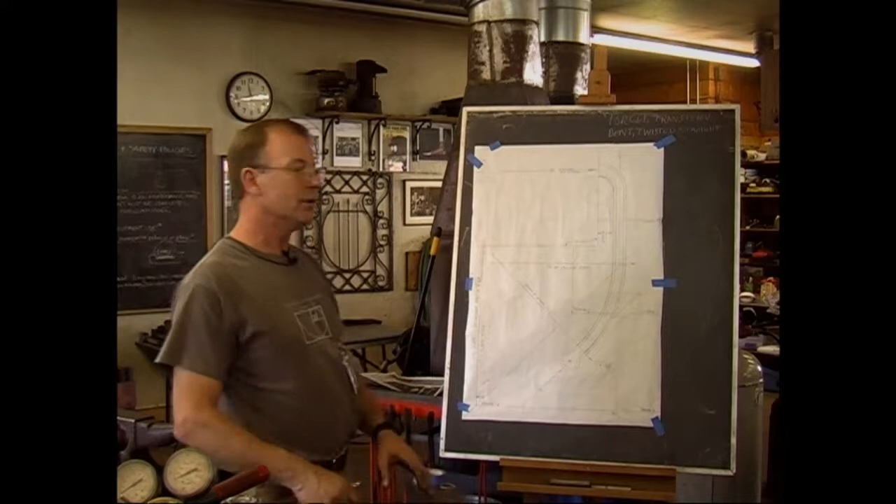Here's another nosing, just so I know where I am. And then here's the last nosing. Code says that a handrail has to go from nose to nose on a stair, except you can end with a volute or a post on the bottom tread. So this one does that. It ends at the center tread here.

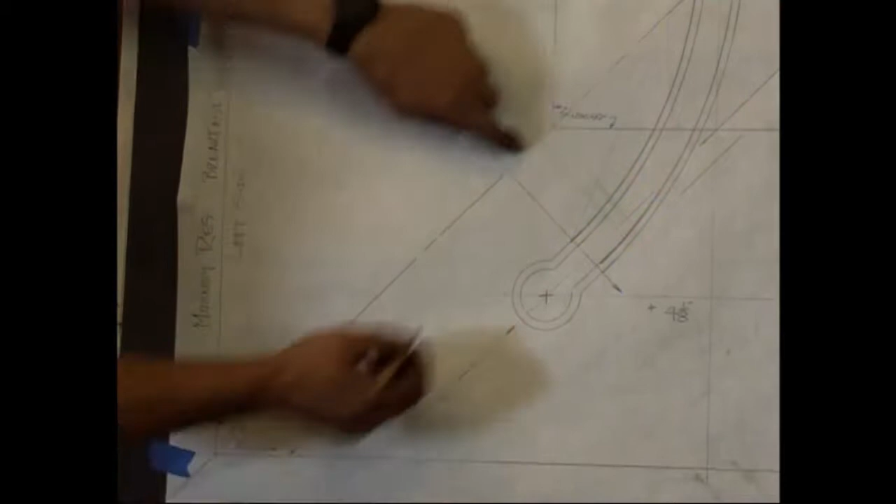And because of walkways, we came in off of this edge. The walkway's narrower than the stairs. Another thing that I drew, you'll see on the elevation drawing, at the bottom of it, I have a long tread drawn. That's the tread from here to here. I didn't use much of it on this particular railing, but there was a similar set that had more stairs going down.

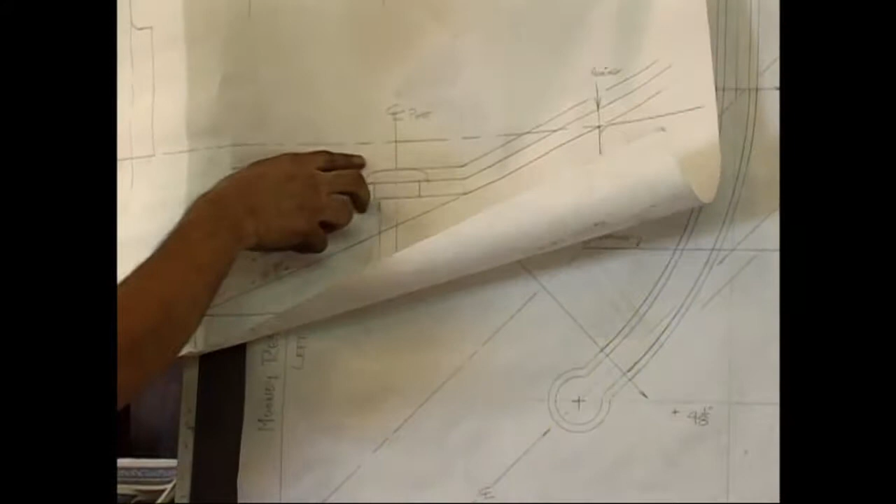So this same stair has the same riser height, but the run is longer because it's on a 45, the diagonal. And so this drawing gave me the math that I needed to create down here on the bottom of your drawing. That's this tread. This tread is a view from here to here. I drew the post in the center.

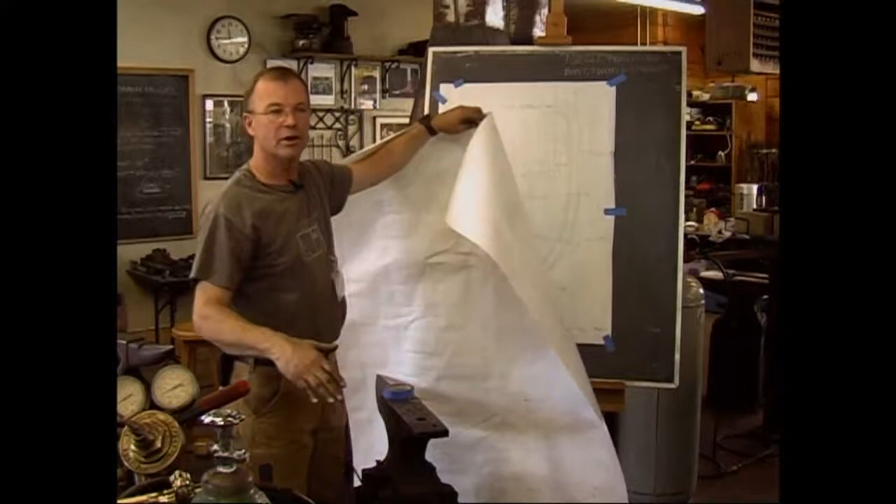And I also drew the level. I knew what I wanted to put on the end, what I thought was a pleasing termination. I drew that here. So I got my math for the form using this rise, and then basically one standard tread riser. And so that equaled the 8.5 inches that I have between the level at the bottom and the level at the top. If you had more treads in there, it would be a taller number and your form would be longer.

The basic things that you need when you go out to measure a stair rail also include the code. I didn't talk about that earlier. So when you go there, you want to know it in your head. If you don't, take a copy of it with you.

When you're looking at it to measure - we do jobs far away, and I did a job in Canada a few years ago, and I had to learn their code, and it's different. It's a lot more stringent than ours. So I knew that code when I went there, and I encountered some things that were difficult to interpret, but I had copies of it.

The builder and I hashed it out, and we resolved that. But I had the code with me, so I knew what the rules of the game were, what I had to do, and that made making my measurements a lot easier. I didn't have to measure everything, just what related to the railing. Does that make sense?

Lee's setting up. We're going to tack the bar that we just bent to this form to hold it in place. We'll do that and get it ready for our next bend. While he's doing that, I'm going to light the little fire.

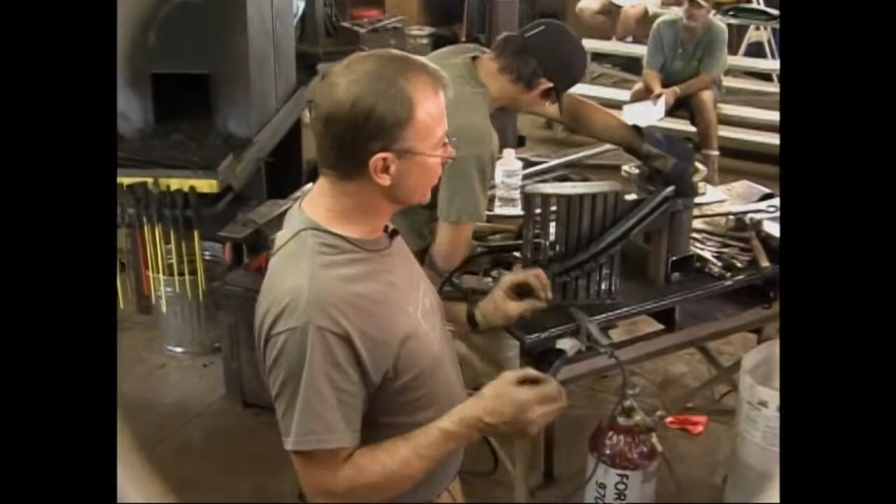When you're bending rings, the circumference of the ring is measured at the center line of your bar for the length. Anytime you're bending a bar - square, rectangular, or round - the length is at the center line. So if you have a 1-inch round or 1-inch square, you have your ID plus 1 inch, 2 halves, and that's how you calculate it. Take the diameter, center line diameter times pi, and that's your cut length for that particular ring. It's always at the center.

That's an important one to know. A lot of guys bend over and then cut them, and I've done that. Then you have to flatten it and make those up. But if you know the length, it comes out right every time.

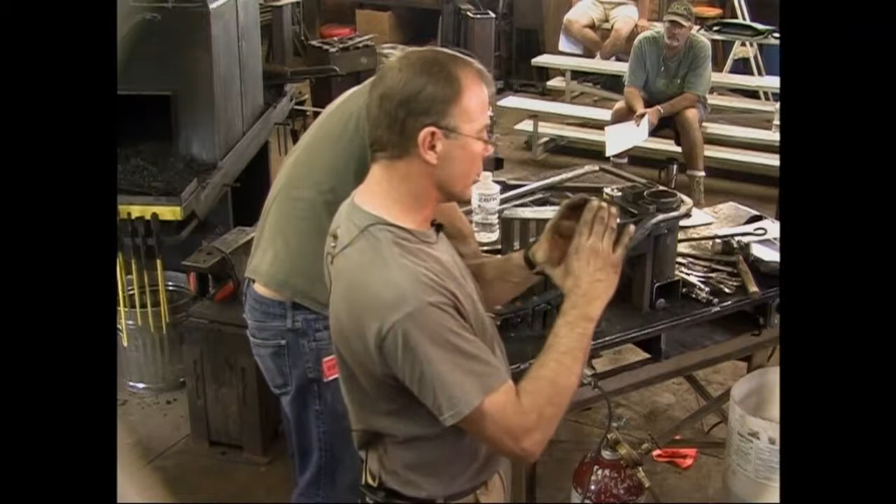Obviously, if you do a small diameter ring - we bend a lot of 3/4 inch round rings for pulls and knobs, door knockers, and they're 6 inches ID - when they come together, square cuts don't butt. Those are beveled.

I know what that is now. I kind of forged that in, upset it a little bit. But your length is determined at the center line of your diameter.

Rob, have you run into any issues with the code concerning - like you said, the handrail generally goes from nose to bottom nose, but the guard, as I understand, isn't required to go that far down. You run into any weird issues where they say the guard doesn't have to go down to anything more than 30 inches off the floor?

Yes. Code treats handrail and guardrail as two separate issues. They are. The guardrail prevents someone from falling through an opening. You can have a guardrail when stairs aren't involved - you have a second-story balcony, and that's not a handrail, that's a guardrail. Anytime you're above 30 inches or 3 rises, you have to have a guardrail.

So on that French railing that I was talking about, when we came down to the bottom, I switched from the pattern that we used throughout the entire stair to a very large scroll with an acanthus leaf in bronze and stuff. I wasn't required to reject a 4-inch sphere at the bottom because I was lower than 30 inches.

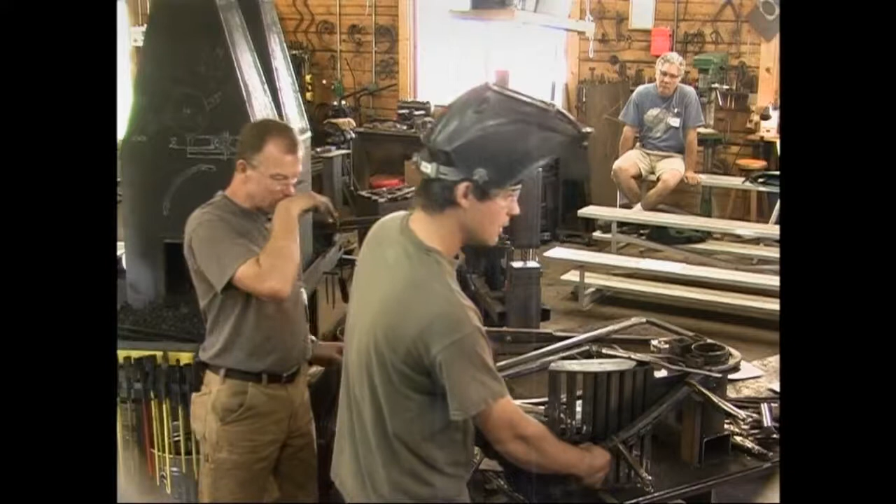We're pretty well fixed at the bottom, so we don't have to do much weld here. He's going to put a couple of big tacks on, because as you work the next layer, the layer underneath always wants to bubble up and out. It's going to get hot and expand between your two welds. So I put them close and fairly large - it's easy to grind, easy to sand. With the heat you'll hear them snap, and then you're in trouble, so keep lots of weld on it.

If I can go - oh, I have my wiring. There you are. You need pliers? Oh, I got it. Where'd the files go? Gordo, that's killing me. Over here, okay. He was looking for a file. There, I think you got it.

That's pretty good, Scott.

I don't know if you guys have these - these are wonderful tools. Caleb Coleman turned me onto this. He came into my shop and I was hanging on to a dead blow rawhide hammer that was really expensive that I didn't want to replace. He said, 'Rod...' and like a week later, one of these showed up in the mail - 24 bucks at HammerSource, hammersource.com, and they sell the replacement tips. They're a little slow, so I bought these at McMaster Carr because they're fast, but they're like $9 for the tips, and HammerSource is less.